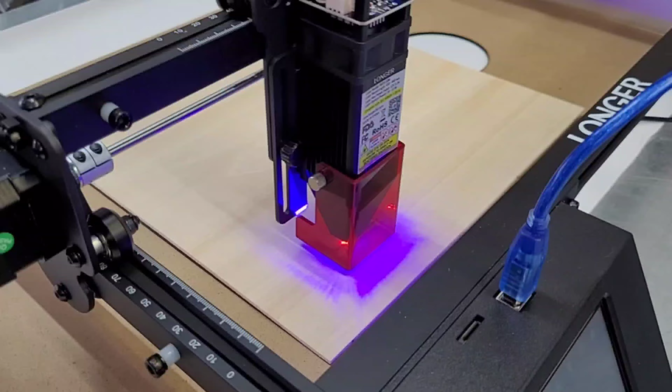We have a little name puzzle as well as a hand cutout. I'm going to show you how to take a picture of a tracing of a hand, get it into Lightburn, and get it sized up to the actual size of the hand you want to recreate.

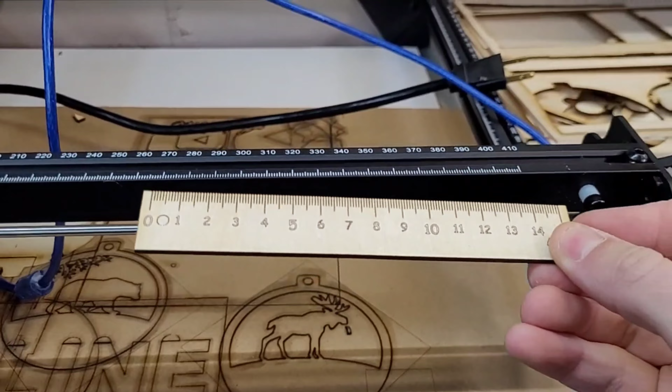This one's going to get a coat of stain on the front, but not the back or the letters. This is a two-piece, so we're going to glue that together. And as always, I'll have all the links below to the wood and the files.

We are using Lightburn once again, so if you don't have it, download it, get your free trial set up, and we'll get started. Okay, so once you open the file, this is what you should see. The name might be different depending on which one I save.

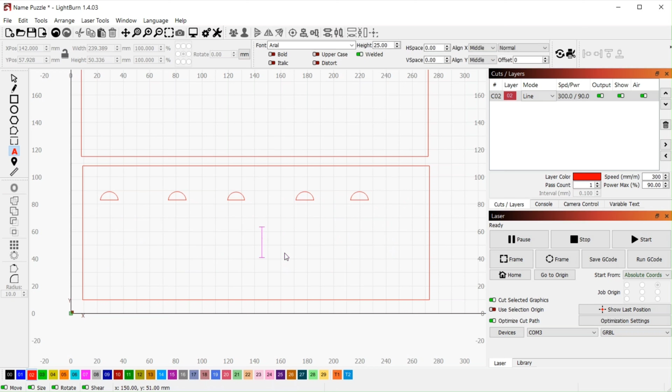I have a number of these to make, but obviously you are going to have to change the name unless you get lucky. For some reason it won't let me edit the text, so we're just going to do a new text box, but if you want to choose a different font, then that'll be just fine.

I do like to do all capitals, so we're going to do an Adeline here. I'm going to pick a nice big blocky font, probably go with Arial Black, and then we're going to scale it up so it fits nicely on our piece of wood.

And we'll just get it centered up, and then all we really need to do is move the little finger cutouts after this.

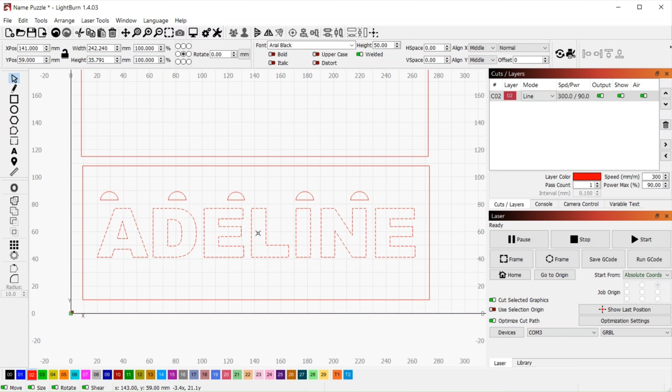So we'll get that moved right down here on top of the A, and we'll just scale it down a little bit. Zoom in nice and close, it helps you get it a little more accurate, and you'll have a little bit more adjustability as far as the grid goes.

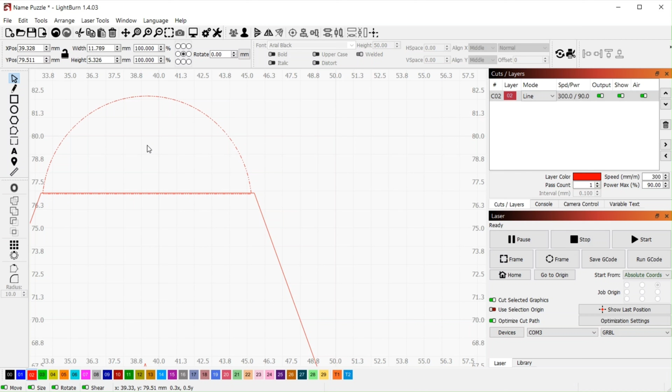As you can see, it wants to snap down, but if I zoom in a little bit closer, it cooperates. Just put the lines pretty much touching each other as close as you can get.

I think I'm going to delete all these and then I'll just copy paste so we have all the same size tabs. And then we just need to repeat that process, get every one of these little tabs down here squared up on the letters nicely, and just do that for each one.

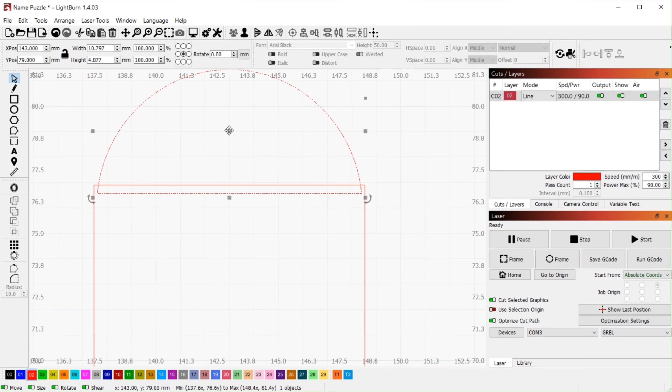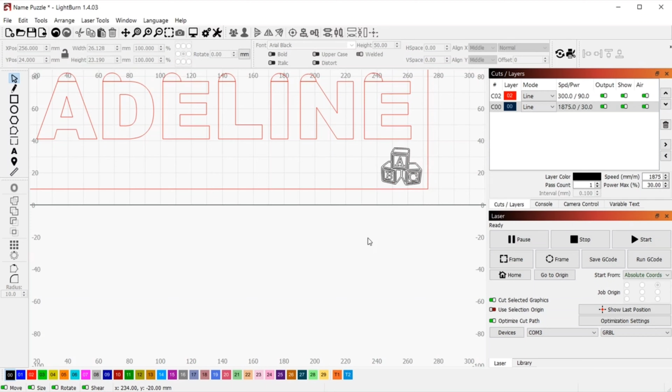And once you have your name set up, you can pretty much go ahead and hit start if you want to. I'm going to add this little block down here in the corner just for a little bit of extra decoration on the piece. I might not actually cut this on the final product, but it's there if you want it. And then I'm going to go ahead and select this first plate, hit the preview button, and just have a look at everything.

This is a good habit to get into just to avoid mistakes. I've caught a lot of mistakes this way, so try to get in the habit of hitting that preview button for sure.

And as long as you're happy with what you see, you can go ahead and select that first plate and hit start. I'm going to make two separate cuts because I'm using some scraps here.

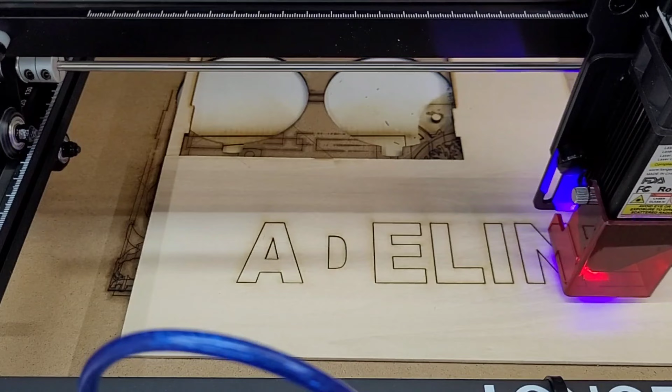Okay, the front plate came out good. As you can see, I didn't put the blocks in this one, and we just need to get these little finger holes popped out. We'll cut the back sheet. This is going to get a coat of stain, and then we'll glue them together.

And for our second project, I'm going to do a tracing of a hand. I'm going to take a picture of this on my phone. I did the tracing in marker. It's just a little bit easier for Lightburn to pick it up if it is marker.

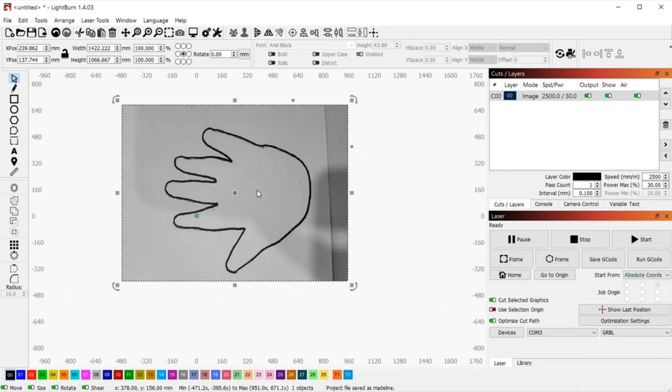So get it in Lightburn and then right click on it and go down to trace. We're going to use the trace feature once again. Come down here and move this slider bar around at the bottom till you're happy with what you get.

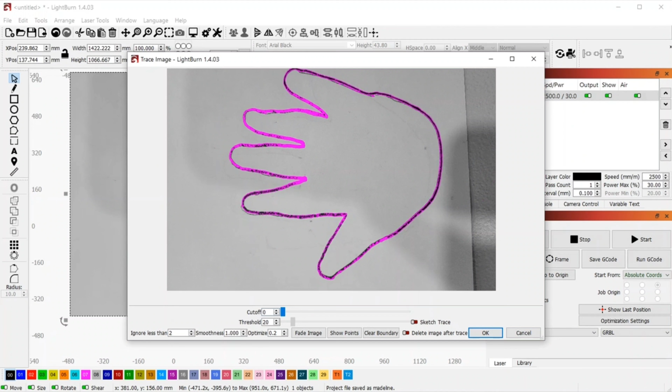There is a little bit of extra noise in this picture, so just slide it around till you're happy with what you see. I'm going to reduce the pixels in the bottom left corner. It says ignore less than 2. I'm going to turn that up a little bit just to ignore small chunks of other markings on the paper. Makes it a little bit easier once we have the tracing in Lightburn.

And then hit OK. You can delete the original image. I'm going to highlight and delete all this extra junk here. First, we need to right click it and click ungroup. Then we can delete the stuff we don't want. And I'm going to turn and scale the picture of the hand down so it fits on our work surface.

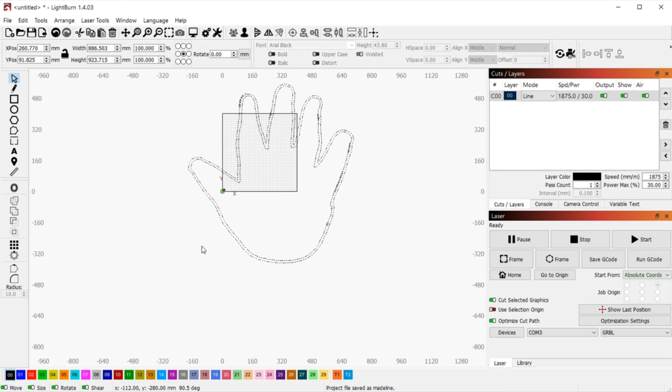And once we have it sized down, you can see there's a few extra marks in here that the trace feature picked up. So as long as you have it ungrouped, you can come in here and just delete the ones that are separate from the main line, the main outline of the hand. These ones are nice and easy, but these ones are going to take a little bit more work to get corrected.

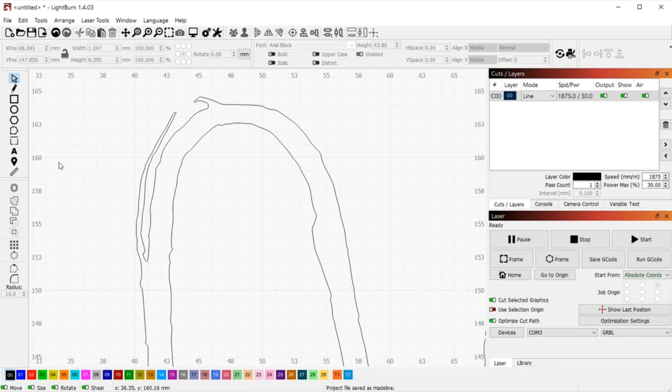So I'm going to use the node feature here. Actually, no, I'm not, that's going to be too much work. So here's a little trim feature. If you don't know how to do this, grab your pencil, draw a straight line sort of where you want the line to be, the original line.

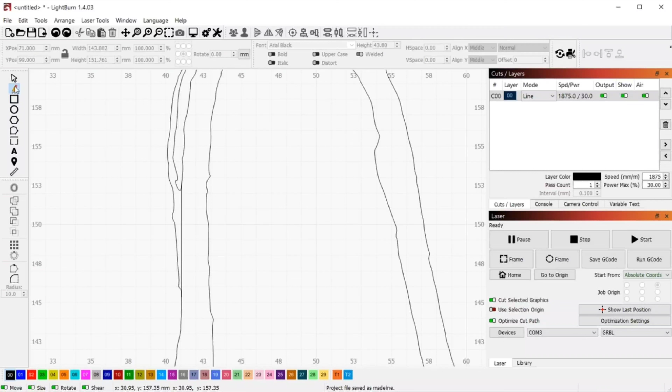So I'm just going to bring it straight down like that. That should be pretty good. Right click off and then go down to edit nodes, select the part that's outside that line and just hit the T key. It'll trim the additional stuff. Lightburn is pretty good at knowing what you're looking to trim after you draw that line. So as long as you've connected the main line, it'll trim anything on the outside of that line that you've just done.

Now, if we have any small ones, we can use the node editor and just pull those squares back into the main line like I did in the last video. If you haven't seen that one, you can check it out right here. But again, this one's going to be a little bit too much work to adjust all the nodes.

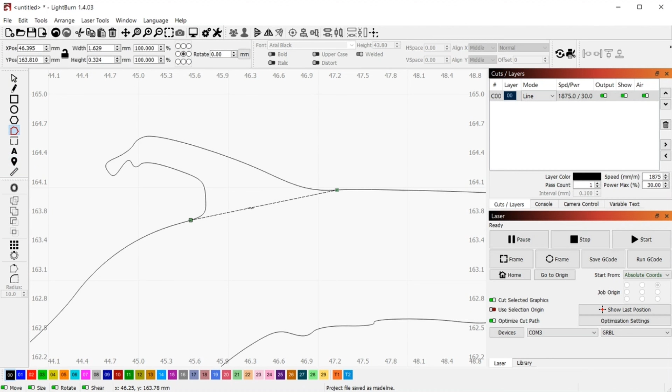So we're going to use the pencil, draw our straight line where we'd like it, and then right click off, go back to the node editor and click on the part we no longer want, hit the T button and it's gone. So much easier to do it that way if you just have some stuff you're looking to trim than dragging all the nodes.

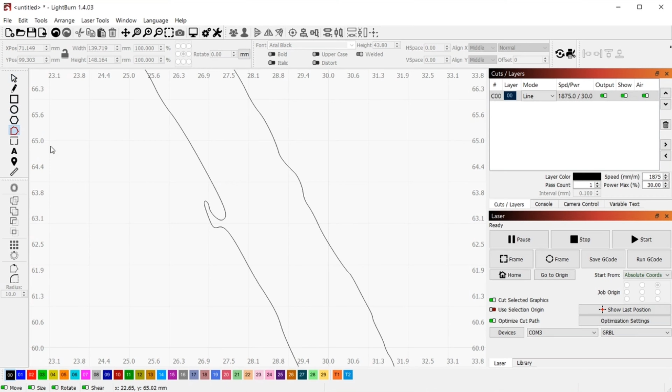I'll try to find an easy one here and show you how I drag the nodes back into the main root. This one over here is pretty small and it should be easy enough. So again, click the node editor button and then you can just move the red blocks back into line where you want them. You're going to have to adjust these blue lines afterwards.

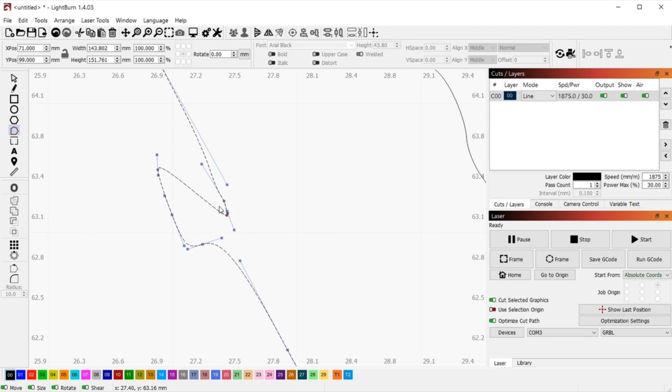Just put them perpendicular to the line you're trying to copy. And you just have to move all of them and kind of play around with those blue lines, get everything straight. It probably is easier just to use the pencil with the trim tool, but if you have a small piece like this, you can try this too.

And after you're happy with all the corrections you've made to the tracing, we're going to make a second layer here. The outer line is going to be our cut line, so I always make those red. You'll notice here on the top left, it didn't get everything. That's just some imperfections in the trace. Once again, probably those spots we fixed. So just make sure you have everything in that outer layer set to the same layer.

Make sure it's going to cut and not just do a line. I actually didn't intend for there to be a double line like this, but I don't mind the way that looks, so I'm going to leave it all alone. The inner line will just be drawn on, while the outer line will be a cut.

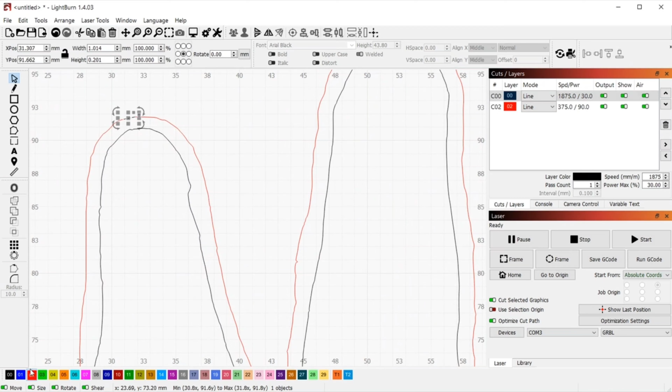And then using our cut layer, I'm going to draw a small circle here and just get it centered up on this finger. This is obviously going to be for the string, so we can hang this from a tree.

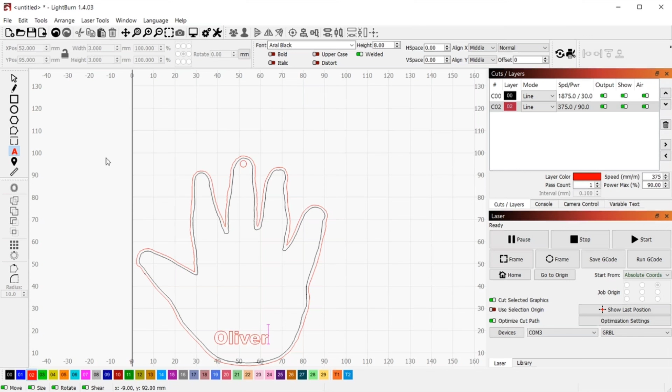And lastly, I'm just going to add a name and an age to this ornament. So I click on the letter A. I'm going to turn down the font size a little bit, put whatever name you like in here as well as the age. And then you can select a new layer for that, make it a fill or a line, whatever you'd prefer to do.

And once you're happy with what you've got, you can head over to the start button and let it cut.